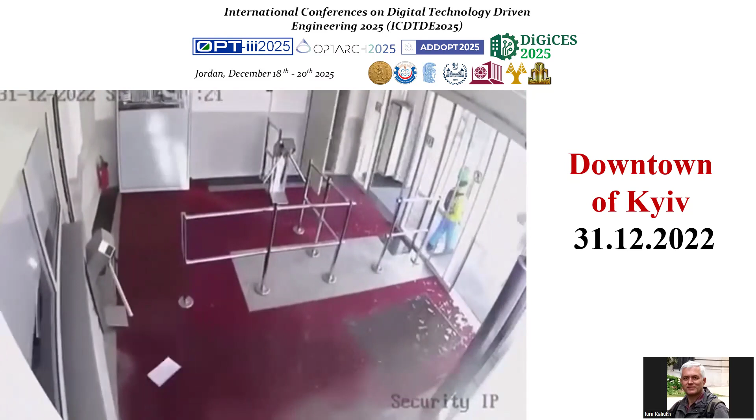The issue of restoring housing damaged due to military actions remains relevant even today. For local communities in Mediterranean countries, this is primarily related to the restorations of the civil infrastructure of Gaza Strip, which suffers from constant bombing by Israeli aviation. The buildings in northern Cyprus, which have been in ruins since the military actions of Greece and Turkey in 1974, remain in a state of disrepair to this day.

According to the United Nations experts, over 33,500 facilities were destroyed or damaged in Aleppo, Syria, and significant parts of a historical center which was included in the UNESCO World Heritage List still lie in ruins. These destructions were the result of combat actions from 2012 to 2022, particularly airstrikes by the Russian Federation on civilian objects in Aleppo, and the siege of the city by the government force of Bashar Assad.

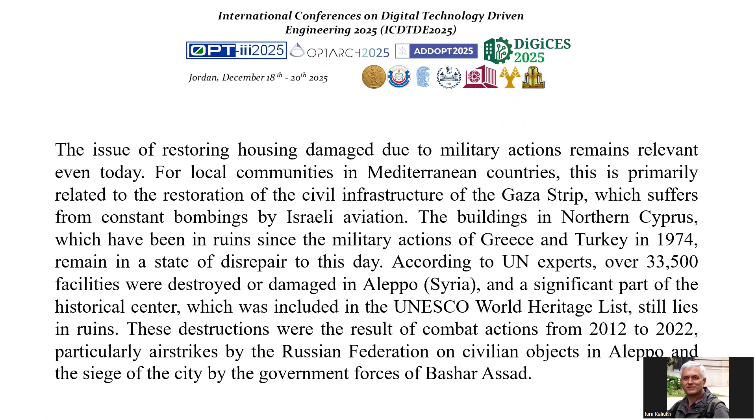On this slide, you can see the service life of our buildings from documents of Federation International Beton number 49. At these points, our building was built. For some small period, the conditions of our buildings will get stronger, as we know from the theory of beton. From these points, the living conditions of our buildings will slowly decrease to these points.

At these points, we will conduct some repairing works to improve restorations of our buildings, and the living conditions of our buildings achieve these points. From these points, next time, our living conditions will slow down to these points. At these points, we will conduct new restoration works and achieve these points, where our buildings will be demolished.

And if our building is under rocket attack, we move from these points abruptly down, very fast down from this point to these points. Our living time is shorter on the right graphics compared with the left graphics. And this is directly connected with the item of my report.

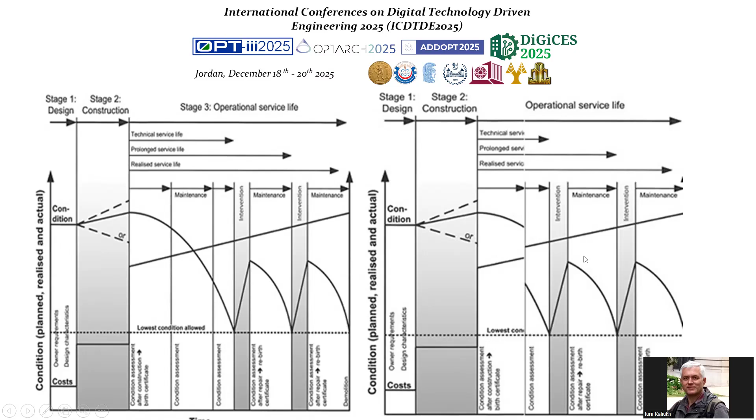You can see on this short video the rocket attacks on the building on the topic of my report. This is a high-rise building under rocket attack. The rocket attack destroyed some parts of this building. After this, we conducted visual inspections of these parts of the high-rise building to strengthen some columns under this column to prevent progressive destruction of these parts of the building.

And after this, we conducted more slowly some deeper investigations of these parts of this building. On these parts, you can see we displayed vibration sensors on the 22nd floor, 21st floor, 18th floor, 16th floor, and so on. The vibration acceleration sensors were arranged during the 27-story building inspection at 6A Lobanovskyi Avenue with damage on floors 18 to 21. Accelerometers are connected on the 22nd, 16th, and first floor.

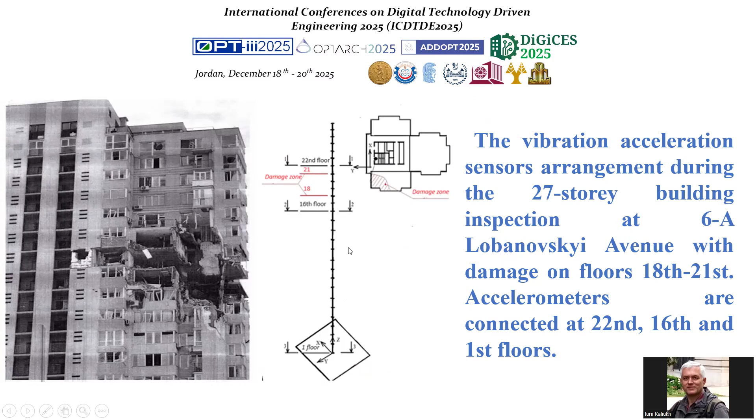On these three graphics, you can see the vibrations from the sensors which are displayed on different stories of this building. Amplitude-frequency spectra of building vibrations in the direction X at 3 points according to scheme 2 at levels first, 16 and 22 floors at 6A Lobanovsky Avenue, building with damage within floors 18 to 21. We can see this spectrum.

And on the next slide, you can see the spectrum on practically the same floor in the building which was not destroyed by the rocket attack. Amplitude-frequency spectrum of vibrations of building 6B Lobanovsky Avenue in the direction X at 3 points according to scheme 2 and level 1.

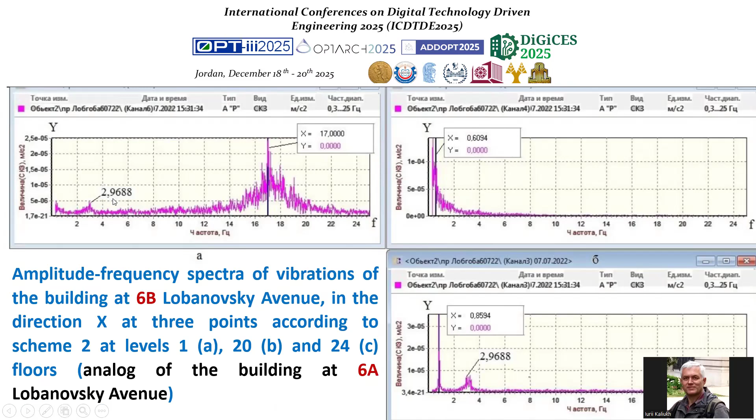Floor 20 and floor 24. Analog of a building, 6A Lobanovsky Avenue. From a comparison of this spectrum, we can conclude the own frequency is approximately 3 Hz. And on the first graphic, on the first floor, 2.3 Hz. What may we conclude?

On the first floor, the own frequency of the building is approximately 20 to 30% lower compared with the undestroyed building. From this we may conclude about the cracks in the whole building from the first floor to the 26th floor, which all influence the living conditions of our buildings, which I represent on the second slide.

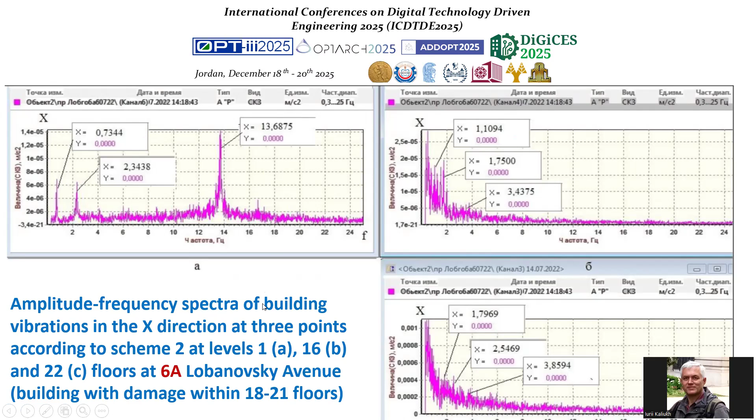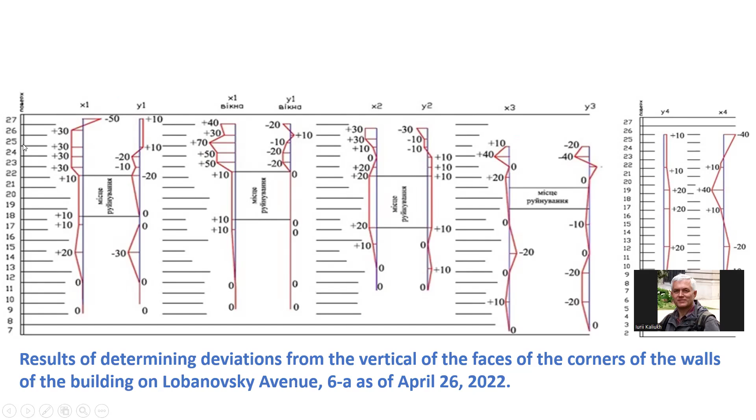On this slide, you can see the result of determining deviations from vertical of the corners of the walls of a building, Lobanovsky Avenue 6A, April 26. You can see deviations on the different floors, 26th floor, 23, and so on.

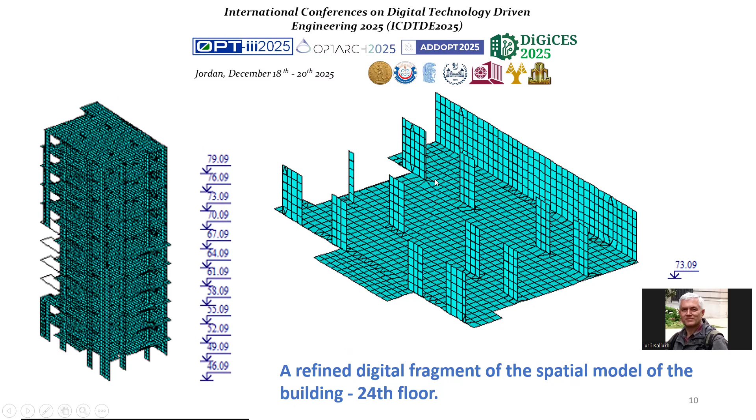You can see some other calculations on this slide. Results of calculations of linear displacements on the 20th floor, taking into account the actual physical and mechanical characteristics of concrete and reinforcement. We need to correct our initial boundary conditions for creating digital twins of these destroyed buildings.

The first stage, this is a digital model. Second stage, the digital shadow of these destroyed buildings, and third stage, the digital twins of this model.

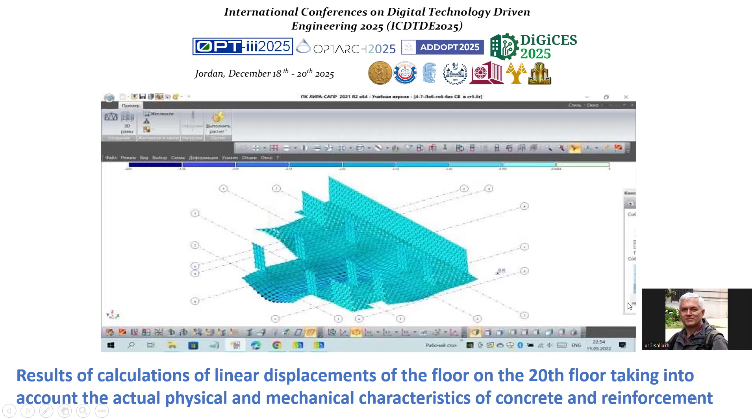Maximum force and load-bearing capacity of sections of a maximum loaded pylon in the house. You can see the ratio of a cross section's bearing capacity T to the force N: 1.02, 0.9, 0.89. We may conclude that this is not suitable for people living in these buildings. We must conduct some reconstructions of this floor to improve this ratio and so on.

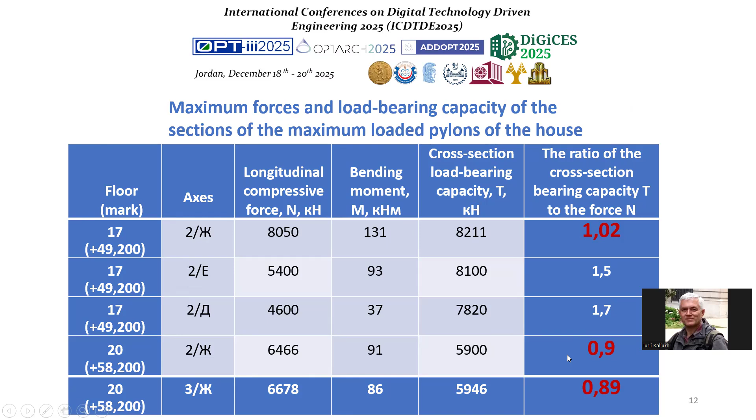Despite the reconstructions of destroyed and damaged floors, failures of the water supply and drainage systems have become more frequent, as reported by residents in July 2024, 2 years after the rocket attack. The presumed cause is internal defects in structural elements and utilities, leading to high failure rates compared to the reference building at 6-B Lobanovskyi Avenue.

General view of the destroyed sections of the building at the 19th to 21st floors. Here is marked the room on the 20th floor that was damaged by a missile strike on February 26, 2024. On the left photo, this is a destroyed flat, later restored on these spots. But we can see some cracks on the wall. Thus, after restorations, we obtained new cracks in these parts.

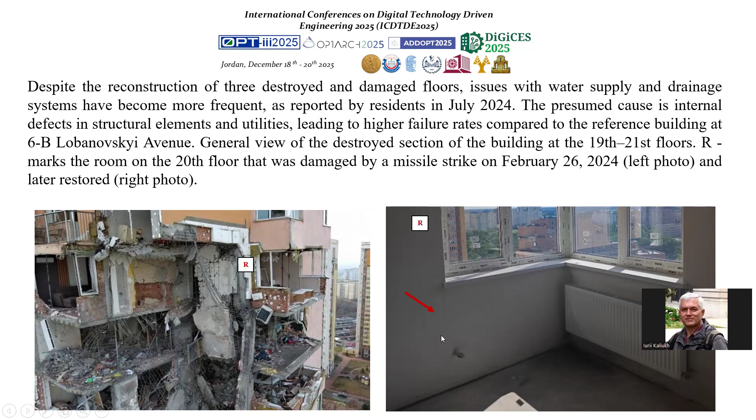Conclusions. The comparison of natural vibration frequencies of damaged and undamaged buildings allows us to conclude that there are cracks in the civil structure of the building at 6-A Lobanovskyi Avenue because of the missile's impact. The natural vibration frequency of the 6A building is 25-35% lower than the 6B building, which indirectly indicates the development of building structure and material destruction in the 6A building and the presence of internal cracks and inhomogeneities due to the missile's impact.

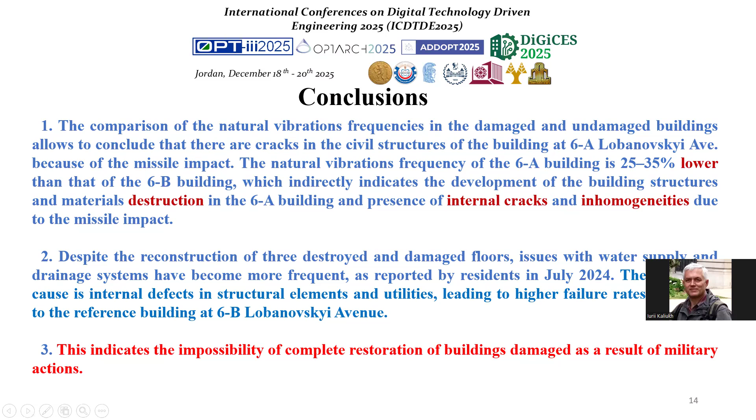Despite the reconstruction of 3 destroyed and damaged floors, failures of the water supply and drainage system have become more frequent, as reported in July 2024. The presumed cause is internal defects of structural elements and utilities, leading to high failure rates compared to the reference building 6-B Lobanovskyi Avenue. This indicates the impossibility of complete restoration of building damage as a result of military actions.